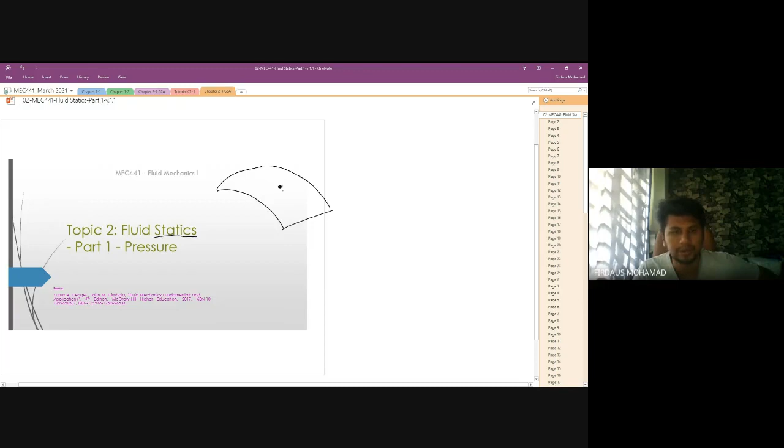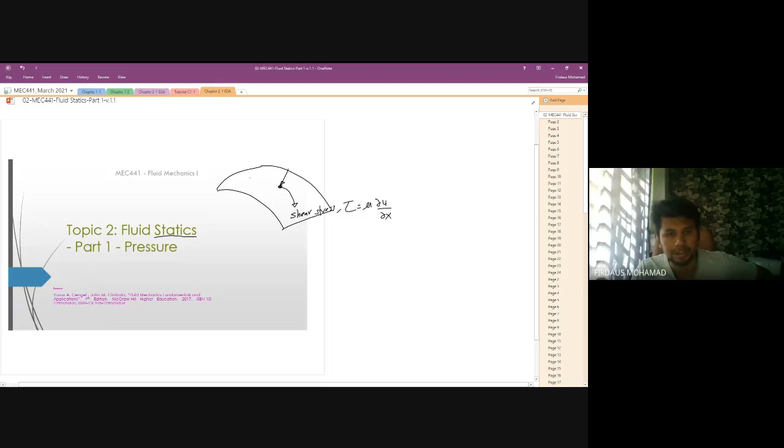Remember before this, in chapter 1 for fluid layer, let's say this is your point, fluid static at point. So there is a stress known as shear stress, tau, which is equal to mu del u over del x. And then there is another stress acting normal to the surface, which is known as normal stress. So for fluid dynamics, there are normal stress and also shear stress.

Fluid dynamic means fluid in motion. However, for fluid static, the shear stress equals 0. So we are not considering the viscosity, because it is static. Shear stress equals 0, no shear stress. The only stress acting around the wall, exerted by the fluid, is known as normal stress. And in static fluid, this normal stress is also known as pressure.

So pressure by definition equals what? The equation for pressure is force over area. Force is in Newton and area is in meter square. So the common unit is 1 Newton per meter square, which is homogeneous to 1 Pascal. This is the unit commonly used to define pressure.

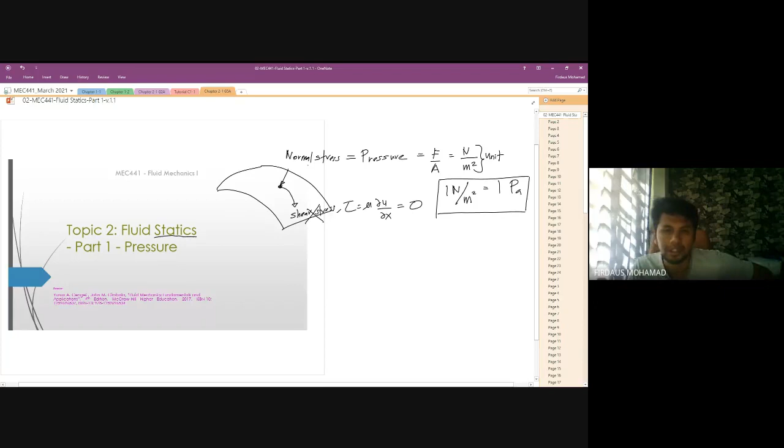So in this first part for pressure, we are learning how to define pressure and how to define pressure based on manometer. A manometer is a U-tube filled with liquid, either water, mercury, or any liquid, and the difference of height in the U-tube can be used to define the pressure.

So the last subtopic in part 1 for pressure, we will learn how to use this manometer. We will also learn how to define the pressure that needs to be considered, which is atmospheric pressure. We use, for example, a barometer, which is the standard device used to measure atmospheric pressure. So there is part by part that we'll be learning today. Let's move to the next slide.

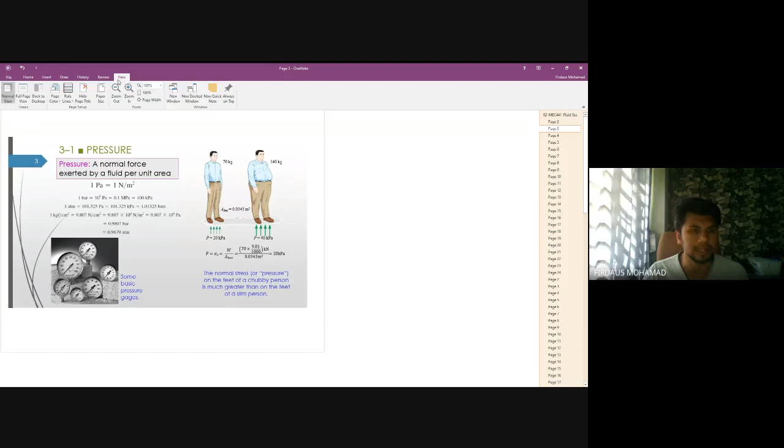Okay, so pressure, as I mentioned, is a unit of force divided by area. So the unit is Newton per meter square, the standard unit based on the equation. So 1 Newton per meter square is homogeneous to 1 Pascal. 1 Pascal equals 1 Newton per meter square.

Sometimes you will find a unit that uses bar. 1 bar, 2 bar, 3 bar, which is common on any pressure measuring device - it will have bar and also Newton per meter square or Pascal. So 1 bar must be remembered as equal to 10 to the power of 5 Pascal, or 0.1 mega Pascal, because mega Pascal equals 10 to the power of 6, or equals 100 kilo Pascal. That's 1 bar.

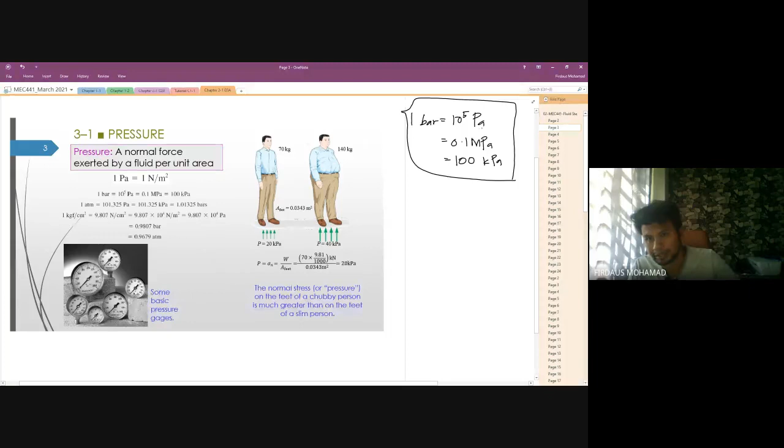Sometimes in the problem or question, the pressure is defined in terms of bar, but this bar must be converted into Pascal or Newton per meter square, because our SI units are based on Newton, which is kilogram force, and based on length, which is meter. So remember, if 1 bar, it must be converted to 10 to the power of 5 Pascal. If 2 bar, that equals 200 kilo Pascal or 0.2 mega Pascal. So remember, 1 bar, 2 bar, 3 bar must be converted into Pascal, which is homogeneous to Newton per meter square. Remember, okay. So we can also define pressure in terms of ATM.

Okay, so 1 ATM atmospheric pressure is equal to 101,325 Pascal, or 101.325 kilo Pascal, or 0.101325 mega Pascal. So this is about 1 atmospheric pressure, which is also equal to 1.01325 bar, if we want to define it in terms of bar.

In the US, the unit for pressure is defined in terms of kilogram force per centimeter square. What is kilogram force? Kilogram is weight, and the force is mass times g, gravitational acceleration, so that's why it is homogeneous. 1 kilogram force per centimeter square equals 9.81, or more precisely 9.807, Newton per centimeter square, because 1 kilogram is multiplied by gravitational acceleration 9.807. So 1 kilogram force equals 0.9807 bar, or 0.9679 ATM. This is the unit that defines pressure.

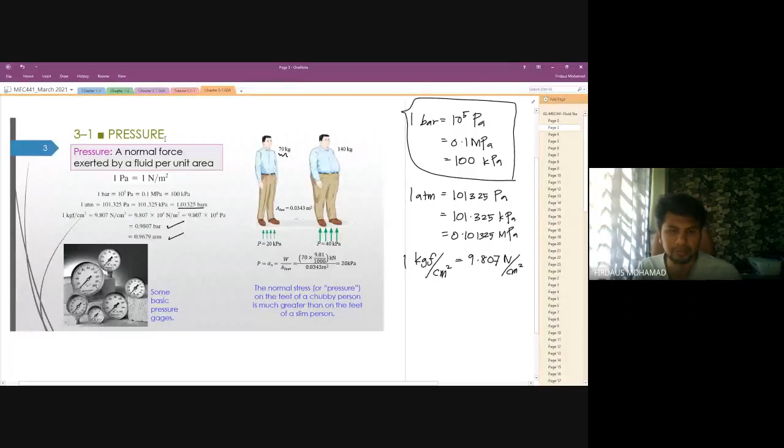Okay, can we continue? Is there any question? No? Okay, no questions, sir. Okay, so...

So in order to get gauge pressure, it is basically absolute pressure subtract the atmospheric pressure. This is how we obtain the gauge pressure. So what is absolute pressure? Absolute pressure is the pressure that we define at that absolute location, which we define as actual pressure at a given position. It is measured relative to absolute vacuum, where absolute vacuum or P absolute equals 0.

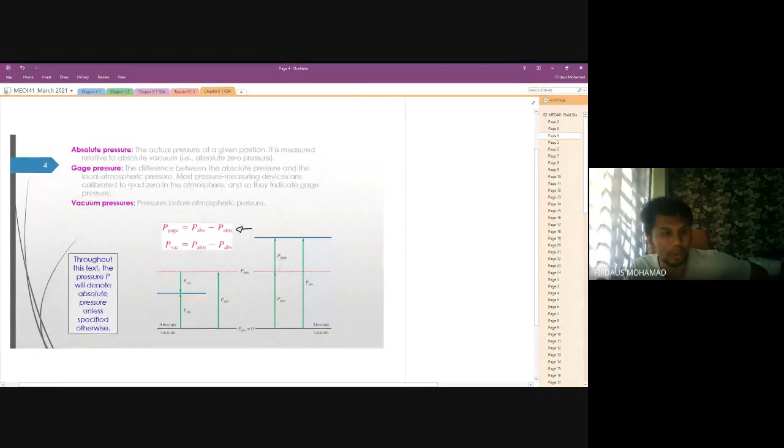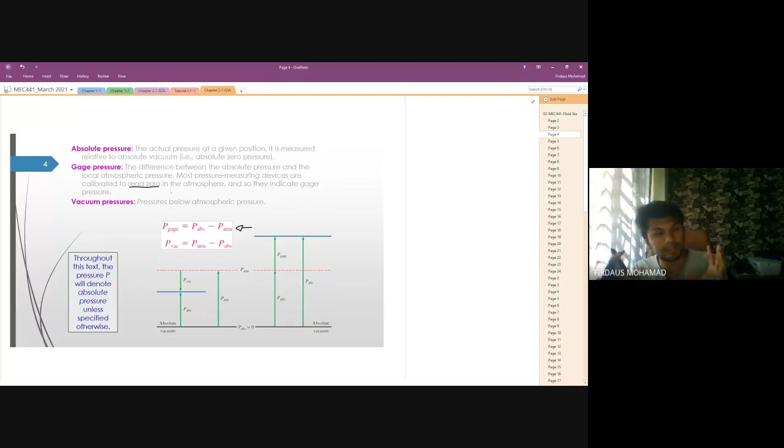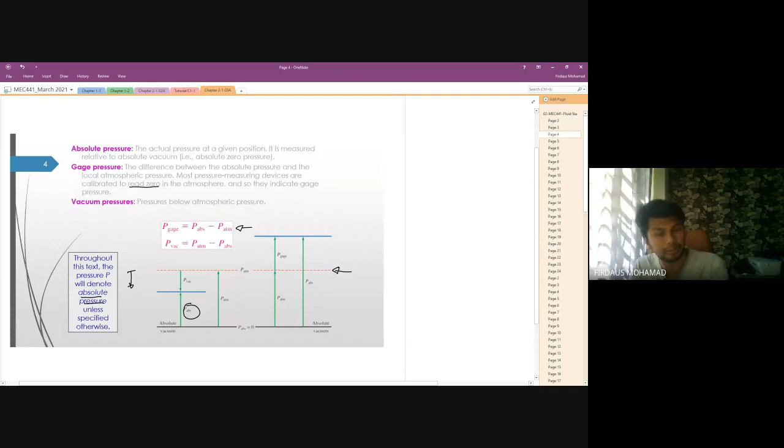And then vacuum pressure is pressure below atmospheric pressure. If you look at vacuum pressure, it is measured below the atmospheric pressure, this red dash line. So in order to obtain vacuum pressure, it is basically atmospheric pressure subtract absolute pressure. In a question, if it's not defined, is it gauge pressure or absolute pressure. Normally it is defined as absolute pressure; if given just P, it refers to absolute pressure. Okay? Any question?

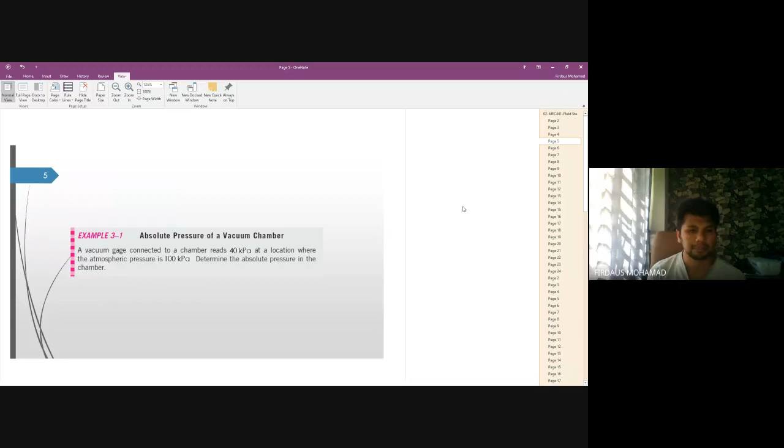Okay, so page number 5. Okay, so this is a very simple example. A vacuum gauge connected to a chamber reads 40 kilopascal at a location where the atmospheric pressure is 100 kilopascal. So dia nak cari, determine the absolute pressure in the chamber. Dia nak cari apa? P absolute sama dengan berapa. Okay, so dia bagi apa ni?

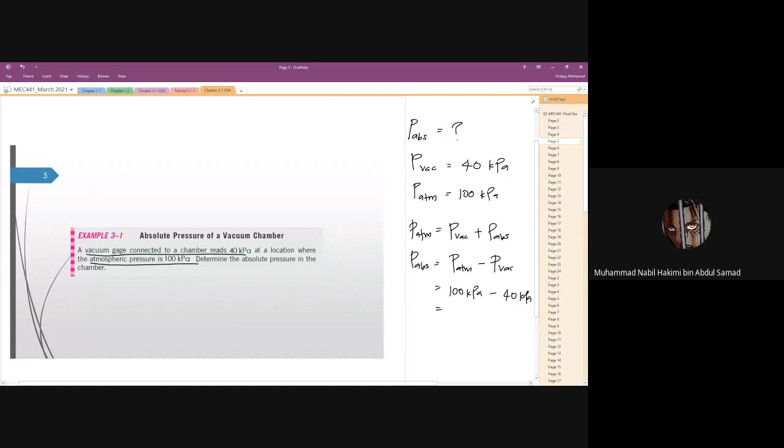Okay, so P ATM berapa? 100 kilopascal. Tolak berapa? 40 kilopascal. So berapa dapat? 100 tolak 40, 60 kilopascal. Okay, so this is how to define ataupun this simple problem to use gauge pressure ataupun vacuum pressure. Okay, gauge yang kat atas lah. Vacuum lower than atmospheric pressure. Okay, ada soalan?

Ada orang nak masuk ke? Okay, ada seorang. Lebih pula lah kita ni. Okay, boleh? Any question?

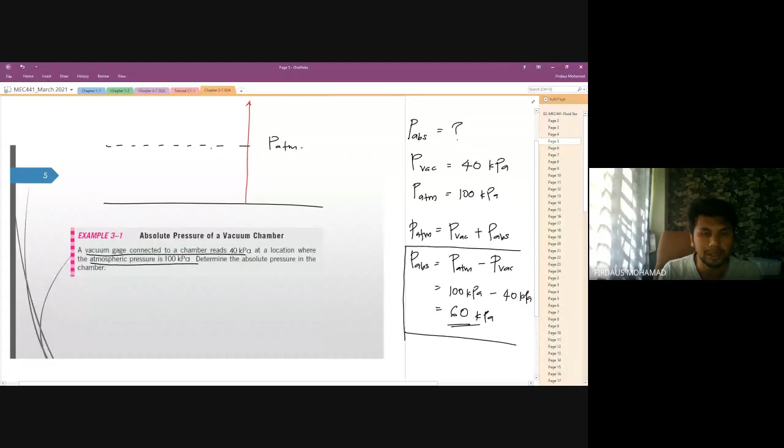So, yang tadi tu you kena ingat lah. You kena ingat, okay, ada line merah. So, this is P atmospheric pressure. Okay, so yang ni kalau standard, P atmospheric. So this is P ATM, and then this is P gauge, and then this is P absolute. So P absolute equal to gauge tambah ATM. So kalau nak dapat gauge pressure equal to P absolute tolak dengan P ATM.

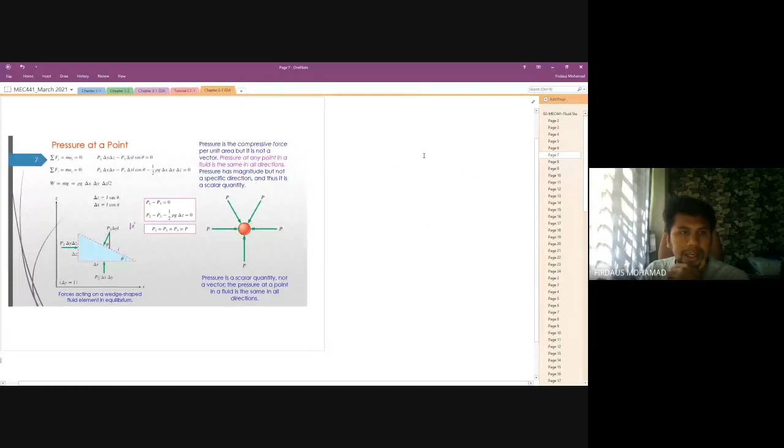Okay, so pressure at point. This is a very important fundamental that you need to know when we study about pressure. Okay, so basically you must bear in mind ataupun you must always remember that pressure does not depend on any direction.

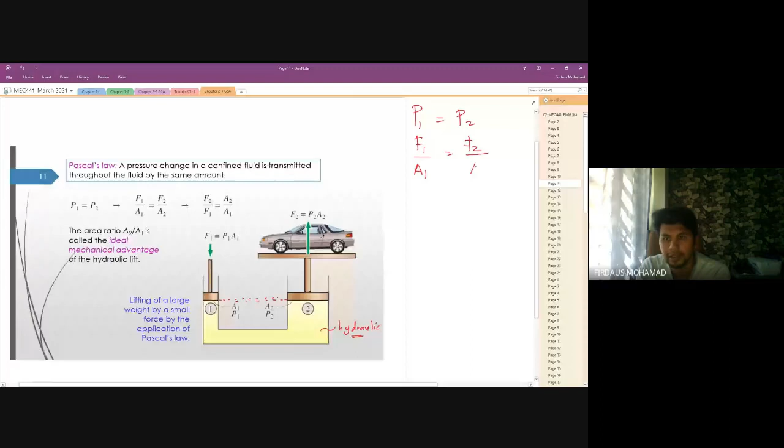So maknanya we can calculate the force, the required force dekat piston ni in order to hold the car at the same level. Okay, same level, maknanya same level of piston. Okay, maknanya kalau kita nak increase lagi tinggi, so kita kena increase the force. Okay, so this is how the concept of pressure variation ataupun Pascal law has been used in workshop ataupun any device yang guna konsep of pressure variation.

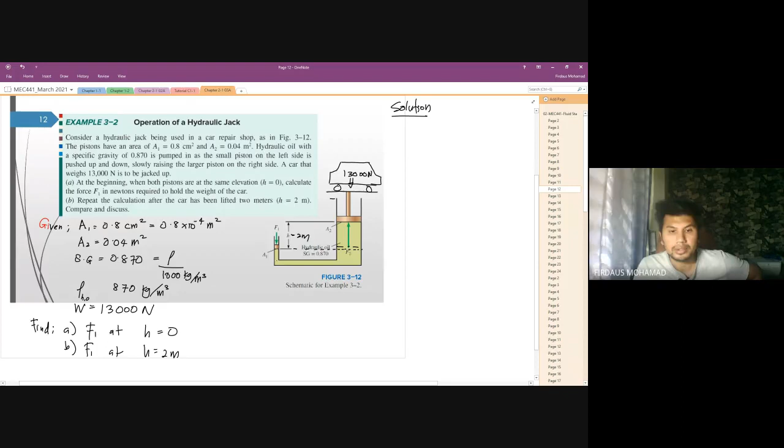Not yet. Okay, so the solution here is to find F. We know F equal to pressure times area. So now there is fluid inside, which is hydraulic oil inside this piston or the system. Okay, so we can use the variation of pressure in order to calculate any forces involved in this system.

Force for 1 or force for 2. Okay, so for A, we want to solve for A, we know F1 at H equal to 0, meaning at the same level. What can be concluded at first sight when we know that the level is same? What do we get? Pressure is the same.

Pressure is same, meaning P1 equal to P2. Okay, so P1 is what? P1 equal to F1 over A1, F2 over A2. So what do we want? F1. F1 equal to F2 over A2 times A1. So easy. F2 is what? What is F2?

13,000 Newton. 13,000 Newton. A2 is how much? 0.04 meter square. A1 0.8 times 10 to the negative 4 meter square. So it can cancel out, the answer is in Newton.

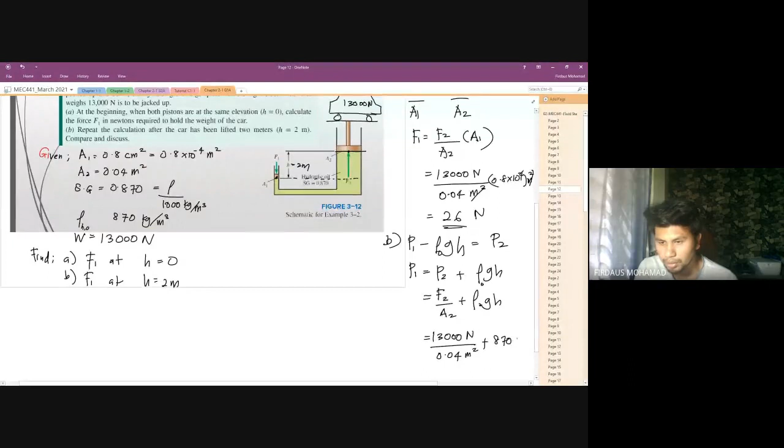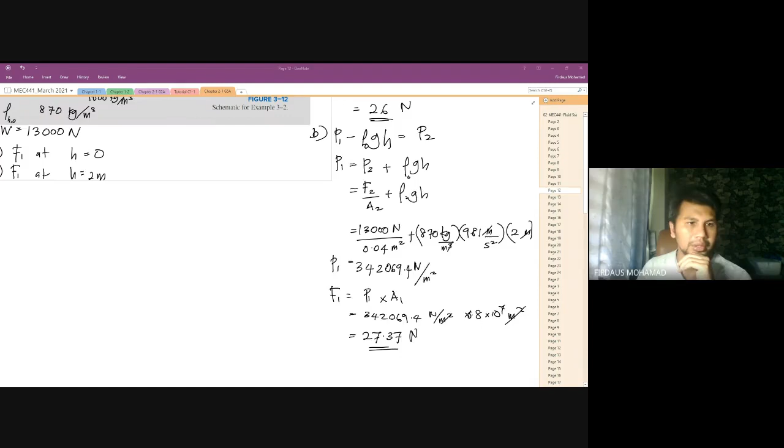Sir, memang dia tolak rho GH untuk apa tu? Ni kan, yang P1. Approach ni kita guna sebenarnya dalam manometer, sama je. Approach dia sama. Okay, so kita start dekat sini, kita start kat mana-mana, yang mana kita boleh start kat sini, so jawapan dia sama.

Kalau kita start dekat P1 ni, dekat point 1 ni yang kita nak ni, P1 kita tengok, kita turun, dia tak ada perbezaan tinggi lagi, fluid pun sama. Sampailah dekat sini. Sebab apa dekat sini? Sebab pressure sini sama, atas ni pressure dia dah tak sama. So daripada sini barulah kita naik.

Ni turun, ni naik. Kalau naik maknanya tolak, negatif rho GH. Tak apa, jadi you akan confuse sikit, tapi kalau nanti kita masuk manometer, you akan faham. Sebab manometer dia akan ada dia punya tube ni macam ni. So you akan ada perbezaan tinggi yang banyak, atas bawah, atas bawah. Macam mana kita dapat? Benda sama. So you akan faham dalam manometer nanti. Okay, boleh?

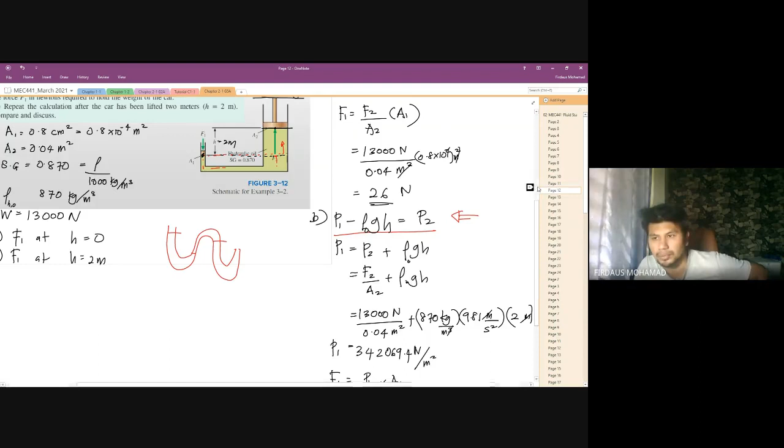Okay, mungkin you tanya kenapa negatif. Sebab negatif ni, sebab inilah pressure kat sini yang kita buat tadi, yang kita buat slide awal-awal tadi, yang dia tunjuk negatif rho GH, sebab pressure kat sini akan sentiasa higher than pressure dekat atas ni. So that's why dia ada negatif. Boleh kita tengok dekat manometer, you akan faham lagi macam mana konsep pressure variation. Jawapan dia sama, 27.4 Newton.

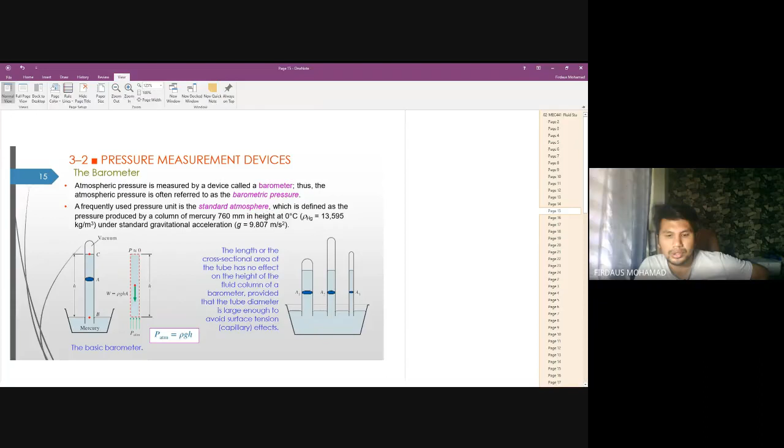Okay, so kita proceed to pressure measurement device. The first one, device that is known as barometer. So this is barometer. What is barometer? Let's say this container is filled up with mercury, and then you terbalikkan this tube, so you akan dapat the pressure, rho GHA ataupun rho GH.

This device is only used in order to determine the atmospheric pressure, PATM, bukan pressure absolute ataupun pressure gauge. Yang ni kita guna untuk determine the atmospheric pressure, guna mercury which is known as barometer. So that's why kalau you jumpa perkataan barometric pressure, jangan confuse. Barometric pressure ni sebenarnya sama dengan atmospheric pressure. Yang ni barometer ni memang untuk measure atmospheric pressure sahaja. Kalau kita nak cari absolute pressure, kita guna tube manometer yang kita akan belajar next slide.

A frequently used pressure unit is the standard atmosphere, which is defined as the pressure produced by a column of mercury 760 mm in height at 0 degrees C. So rho for mercury is 13,595 kg per meter cube under standard gravitational acceleration of 9.807 meter per second square. The length or the cross-sectional area of the tube has no effect on the height of the fluid column of barometer, provided that the tube diameter is large enough to avoid surface tension ataupun capillary effect.

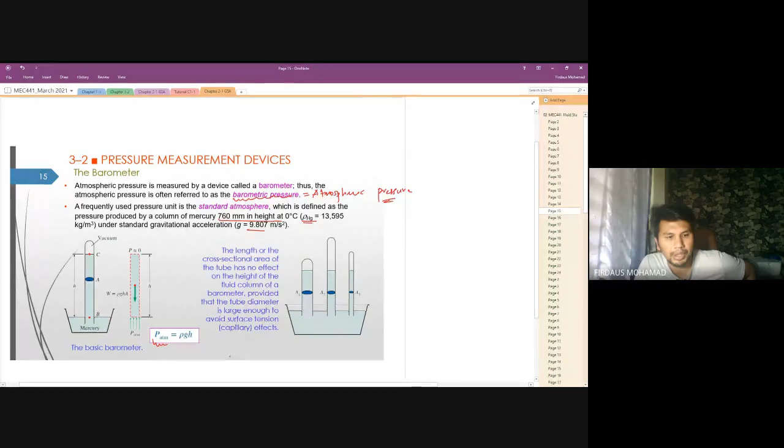So from this barometer, we can determine PATM equal to rho G H. But bear in mind, PATM ni untuk barometer je lah. H ni, H yang dia dapat daripada barometer reading. Okay, so this is for atmospheric pressure.

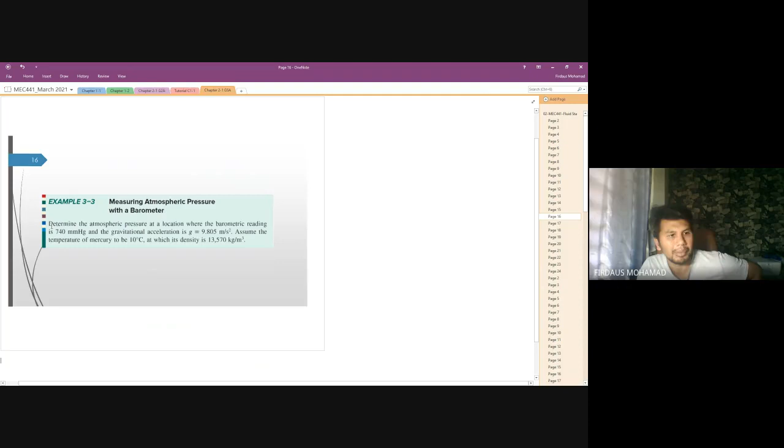So nanti you boleh buat contoh ni, contoh for the atmospheric pressure, macam mana cari atmospheric pressure based on barometer reading. Dia dah bagi reading semua tu, kita masukkan je and then dapatlah dia punya reading atmospheric pressure 98.5 kilopascal.

Yang ni kita nak, yang penting ialah tube manometer. Yang ni lah yang saya tunjuk ni, yang banyak tube ni, this is defined as manometer. So this manometer is used in order to calculate the pressure difference, to calculate pressure difference at point 1 and point 2 for example.

So kita guna manometer, pressure at 1, kita calculate pressure at 1. Semua ni kat pressure at 1, kita boleh guna manometer. So what is manometer? Contains one or more fluid such as mercury, water, alcohol ataupun oil.

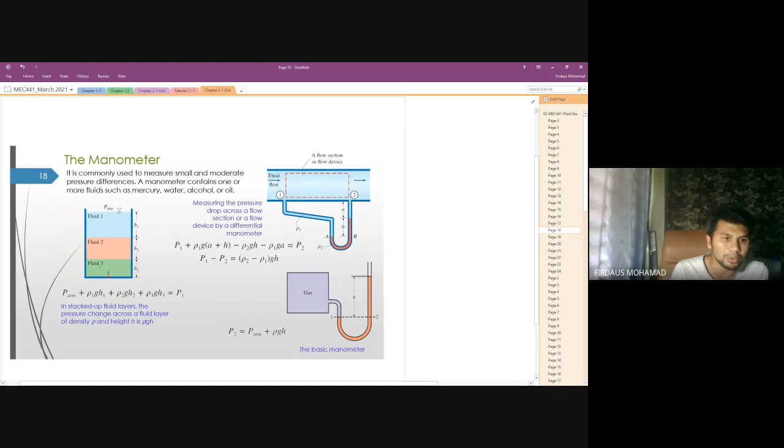Yang ni yang kita nak tengok tadi, yang saya tunjuk approach tadi. Kenapa yang saya tunjuk tadi dalam container? Konsep dia sama, dalam container kita boleh guna untuk the same concept untuk manometer. Saya tunjuk dekat manometer, dekat container ni dulu. Dia ada fluid 1, maknanya dia ada rho 1.

Rho 2, rho 1 and rho 3 - maknanya different fluid and then different H. Okay, so kita tengok kita nak start kat mana. Contoh kita start dekat surface. Surface ni defined as atmospheric pressure sebab dia open to the atmosphere. Okay, so PATM, kita start dengan PATM.

Okay, kita dah start PATM, kita turun. Kita turun bawah, kita jumpa fluid 1 and then dia ada satu level sebelum masuk fluid number 2. Dia ada elevation difference dekat H1. Dia turun ke bawah, positif ke negatif saya cakap dia? Turun ke bawah, positif. Sebab apa? Pressure, kita nak tunjuk pressure dekat atas ni rendah daripada pressure dekat bawah. So rho 1, tambah ke tolak, turun, still tambah, which is rho 2.

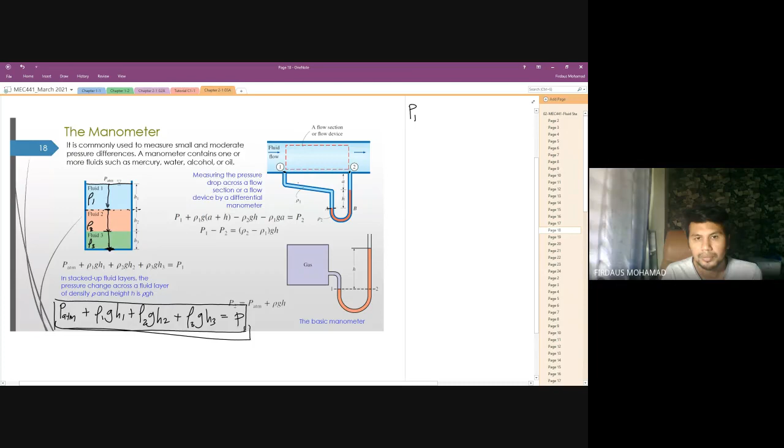Dia turun sampai sini, turun fluid sama, rho 1, turun sampailah dia jumpa elevation different, and then sebelum dia masuk fluid number 2 which is rho 2. Okay, so kat sini kita tahu turun ke naik ni, kalau saya punya ni P1 dia turun kan, turun sampai sini. Turun tambah tolak, tambah. Okay, tambah rho 1 G. H dia apa ni? H dia adalah A tambah H. Okay, dia dah sampai sini, dia masuk fluid berbeza, rho lain dah.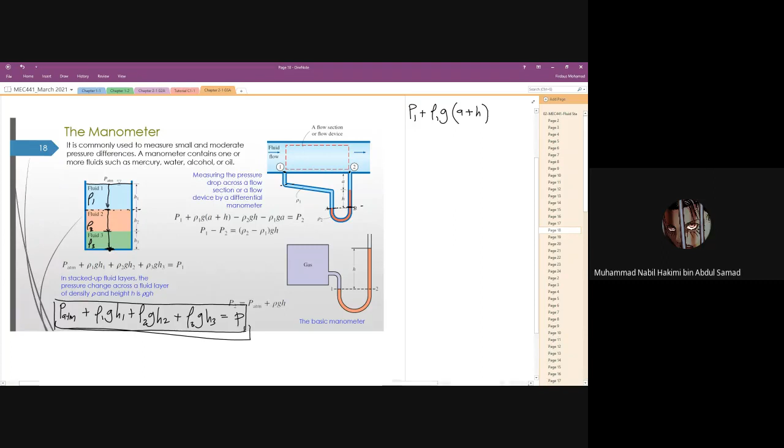Okay, so kat same level, the pressure dia sama. Sampai sini dalam tiub ni sama, sampailah sini. Okay, sampai sini barulah dia naik. Perbezaan tinggi, dia naik ke H, tambah ke tolak? Tolak. Kenapa tolak? Sebab dia dah berbeza arah, so now it is minus sign, negative. Rho apa ni? Rho 2 G. G apa? GH. Okay, rho 2 GH, and then sampai sini kita dah sampai H.

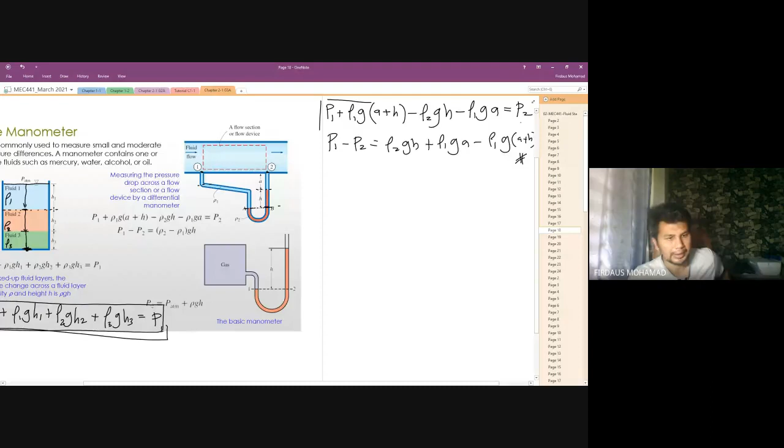Okay, dia dah masuk fluid lain, water ataupun rho 1. And then dia ada perbezaan tinggi. Tambah ke tolak? Tolak. Rho 1 G apa ni? A. Rho 1 GA. Okay, sampailah sini dah, tak ada, dah sampai point 2. Dah tak ada different elevation dah, kita pun stop, tambah dengan P2. Okay, so kita dapatlah P1 ataupun kita rearrange, P1 tolak P2 equal to mana? Ni, you rearrange balik, dia akan dapat rho 2 GH tambah rho 1 GA tolak rho 1 GA tambah H. Okay, so this is the basic concept of manometer. Boleh? Boleh. Okay, very good, boleh.

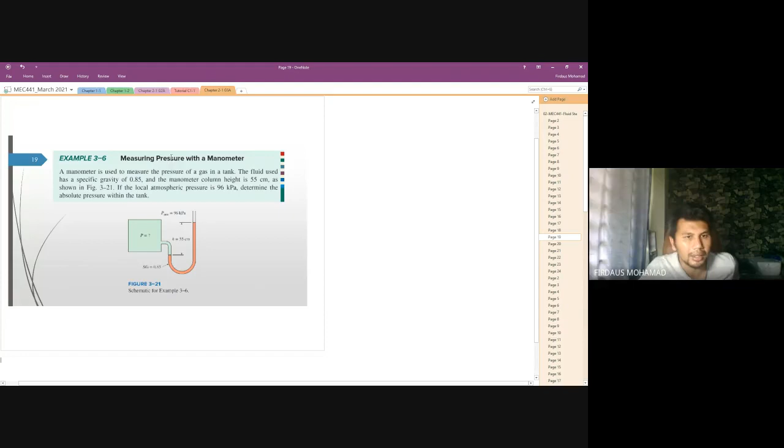Okay, so ni pun sama dalam gas ni. So kita tengok next slide dia apa. Oh, next slide dia dah example. Okay, so kita cuba you buat example ni, guna konsep sama tadi. Determine the pressure dalam ni, absolute pressure within the tank, dalam tank. Gas, dia guna gas ni.

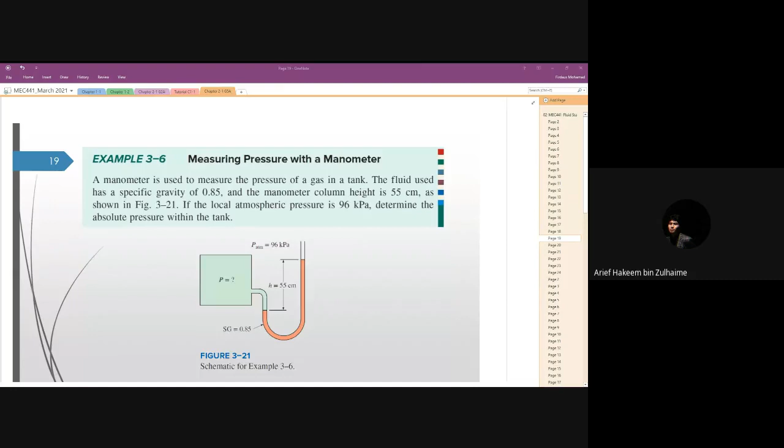Okay, siapa dapat jawapan P? What is P? Anyone got that? Sir, ya, 100.59. You dapat berapa? 100.59. 100.59 kilopascal atau pascal? Kilopascal. Okey, ada jawapan lain?

Okey, so kita tengok betul tak jawapan dia. Okey, so dia nak cari absolute pressure, P absolute within the tank. Okay, so kita start. Kawan dia nak cari P, kita boleh start kat sini. Okay, so start kat sini dia exposed to the atmosphere and then P atmospheric is given. So kita start dengan PATM. Okay, kita jumpa apa ni, dia gas ni apa? Fluid. Dia ada fluid dalam ni, dia tak bagi fluid apa tapi dia ada fluid. Dia ada perbezaan tinggi sampai mana? Sampai H 55 cm. So tambah ke tolak? Tambah. Okay, turun tambah rho apa fluid tadi? Rho G H. Okay, sampai sini okay dia dah manometer.

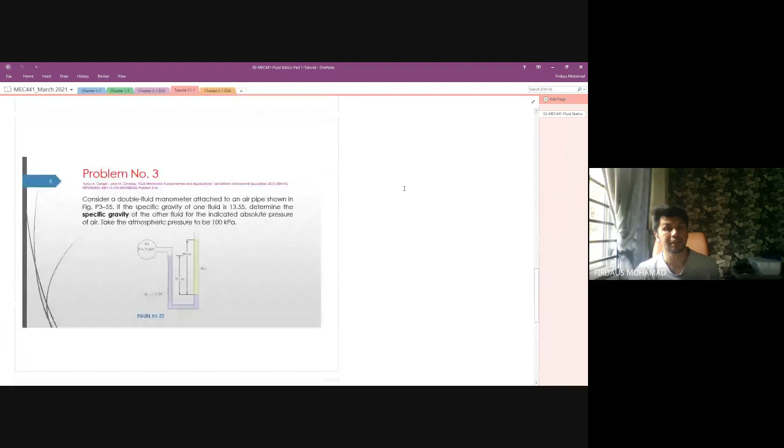Okay, so any question from the floor before we end our lecture?